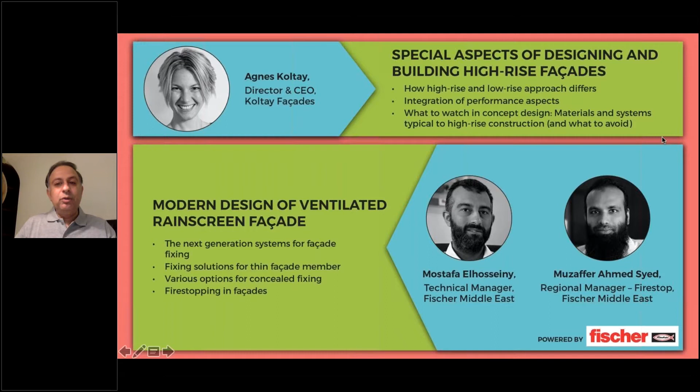Followed by that, we have two of our good friends from Fischer Middle East, who will be talking about products. We have Mostafa, who's a technical manager at Fischer Middle East, and probably to just introduce you to them a little bit.

Agnes is a master's in architecture from Hungary and a master's in facade engineering from the UK. She's worked with Zaha Hadid. I don't need to introduce that. And she's worked at Meinhardt, Ramboll. So before she started her own service here, she was at a consultancy firm, a large practice in the Middle East, very well known, also with an office in Singapore. So she has all the ultimate capabilities, and I will leave it to her.

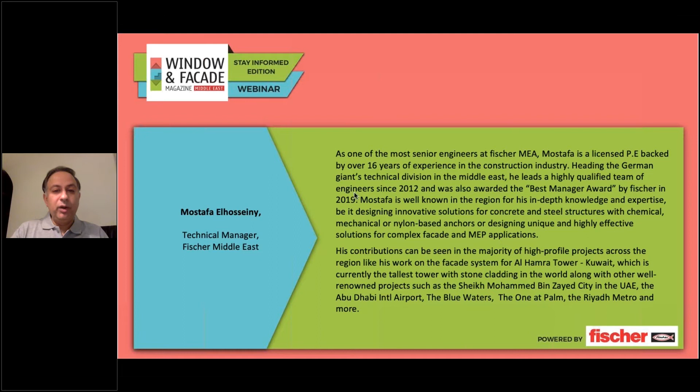Thereafter, we have Mostafa. He's a technical manager at Fischer from the Middle East. He's a licensed PE backed by 16 years of experience in the construction industry. He was awarded the best manager by Fischer. Mostafa is a well-known person in the region. I guess we have a lot of architects and consultants here in this webinar today, so I guess that you would all know him. He will talk a little bit about himself once he starts.

Also, we are joined by Muzaffer Ahmed Syed from the Firestop department, from the fire range of Fischer. He's also a successful and qualified engineer, and his specialty is Firestop. He's going to talk about post-installed anchoring installation systems. He's from IIT, which is a good institution, one of the top institutes in India, and the Institution of Fire Engineers in the UK.

So, ladies and gentlemen, today's webinar is going to be sequenced like this. I have introduced the speakers. Once that is done, then we have a presentation of between 25 to 30 minutes by Agnes Koltay, followed by a presentation by Mostafa and Muzaffar from Fischer.

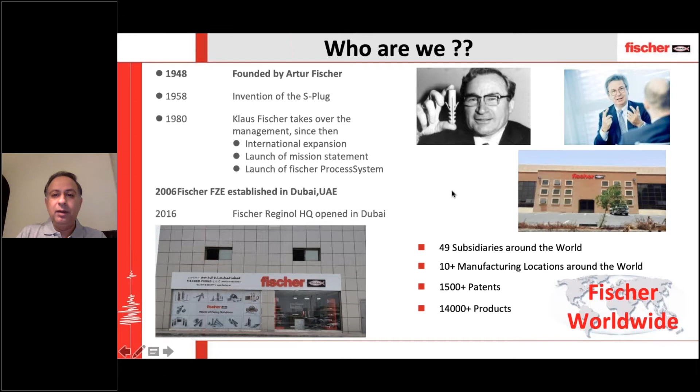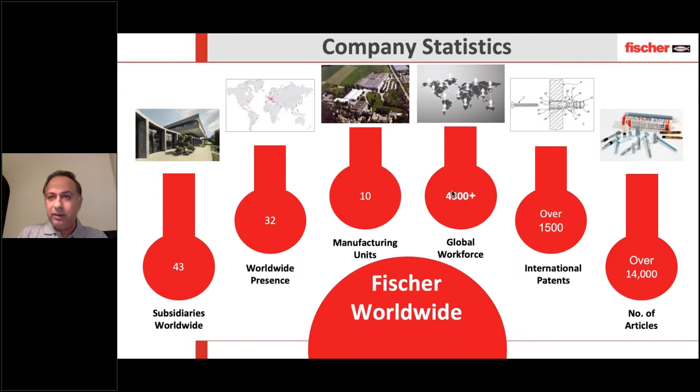So I would now like to ask to bring on Agnes. My colleague at the back end will make her the presenter, please. And Agnes, over to you now to give your presentation. Agnes, you'll have to switch on your camera. Okay, camera is on. All good. Okay, I think it's good now. Can you hear me? Yes. Okay, please. Welcome everyone.

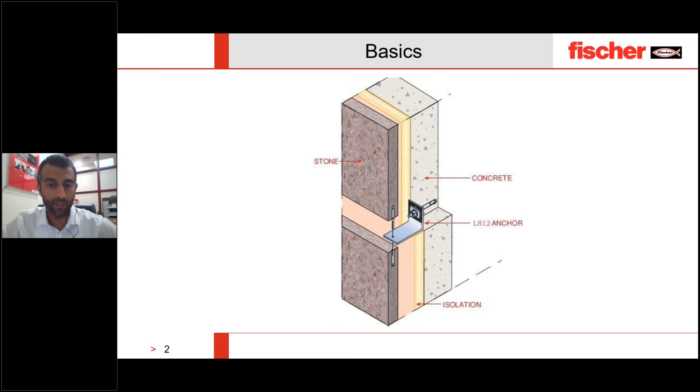And now, after her presentation, we know that the fixing system is important for high-rise, even for low-rise buildings. In the past, there was a need for mechanical fixing, and one of the most famous mechanical fixings for stone is called the pin system. But still, this system has a lot of challenges with the consultants and with the designers. One main thing is the thickness of the facade.

As we know, we have to fix the fixing on the edge. So the edge is a very important factor, and the minimum I think is 30 mm for soft material, and 20 mm can work for hard material with care. The second important factor is the offset from the wall. Usually we have small sizes of stone, and when we have a big offset from the wall, I don't always have concrete to fix my anchors. So I will have a lot of load on the bracket and on the anchor as well, and I might have masonry, which sometimes creates a need for a secondary steel structure.

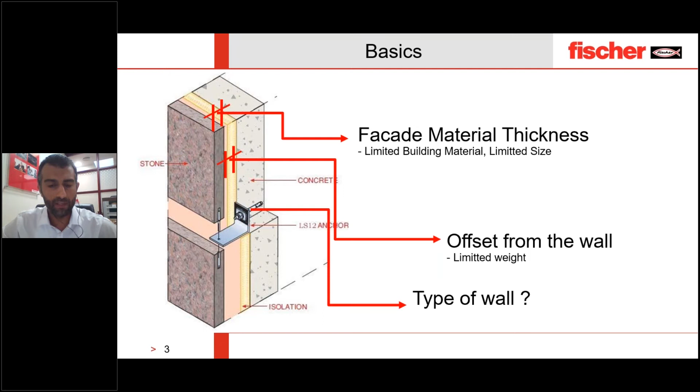The third challenge is the type of the wall itself. Sometimes we have concrete, we will be happy, and a lot of times we will have masonry, and sometimes we'll also have white masonry which is weak. These challenges we face in the design stage, but this is not the only challenge. If you focus on the screen now, one of the most important real challenges for the pin system is how to install it on site.

Usually, because they have to fix the pin in the thickness, they have to drill in the side of the panel. Laborers, to take care not to scratch the surface of the stone, go a little bit to the backside and drill on the side. When they do this, unfortunately, they cause some failure to the panels, and they take the easy way by putting some repair for the stone or some epoxy and fixing it. What happened here? The system is no longer a mechanical system, it became a mechanical system with glue.

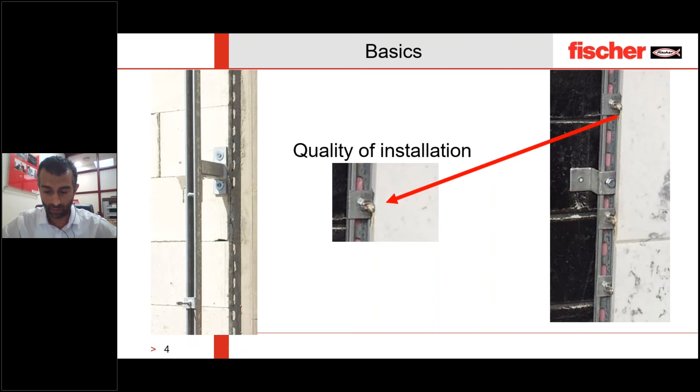And it can cause a failure or safety issue when we have thermal expansion, or also over time with the high temperatures here in our region, the glue can change. So we can also have a failure after some years due to a gluing problem. Due to that, Fischer took this requirement of our clients into consideration. And as we are a specialist in fixing since 1948, we started to develop a system for stone fixing in 1973. It was our first stone fixing.

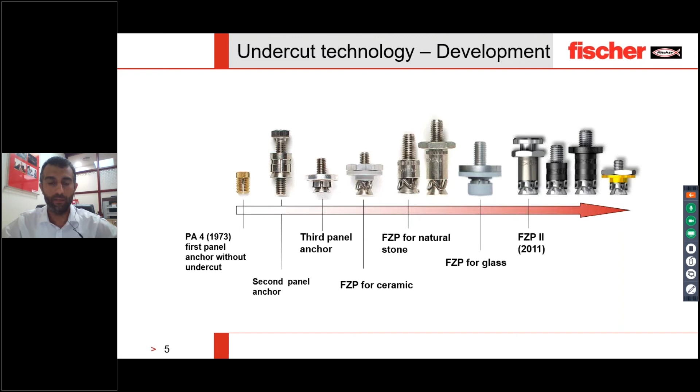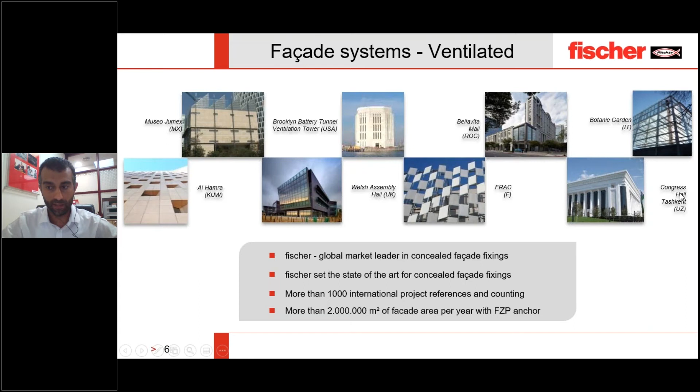From that time till now, we developed our undercut system successfully, and Fischer, a market leader in fixing, is selling yearly more than 2 million square meters of facades. We also have more than 1,000 international references worldwide. You can see here on the screen some of these references.

Fischer developed a system which we can call a universal mechanical system, because it can work for thick stone and it can work for thin material. This advantage of working with thin and thick material means the system can be used for different materials, not only stone. It can be used for stone, ceramic, porcelain tiles, natural stone, fiber cement, GRC, HPL, any material whose thickness is more than 8 mm. We have a good solution for this.

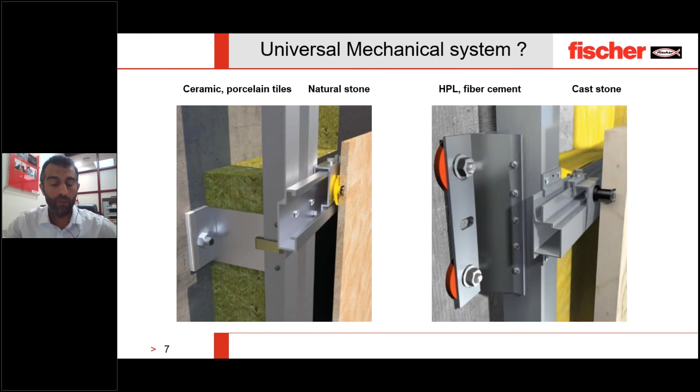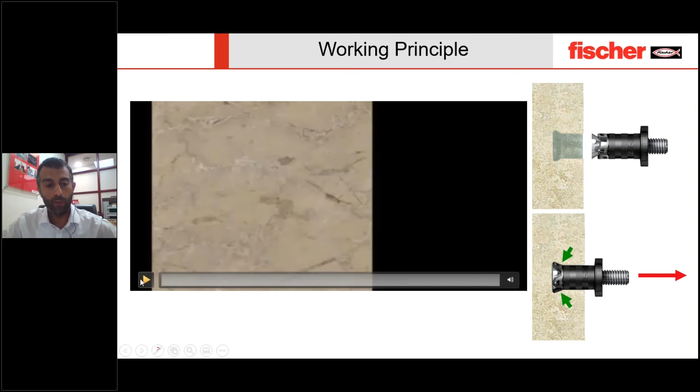This gives our clients, our architects, a wide range of solutions to use the suitable materials and the beauty of the materials in the facades. How does the system work? The system idea is easy and professional. The idea is to create an undercut hole in the stone, meaning the hole inside the stone is bigger than the hole outside the stone, and transfer the actions, wind load, weight of the stone, whatever it is, from outside the stone to inside the stone.

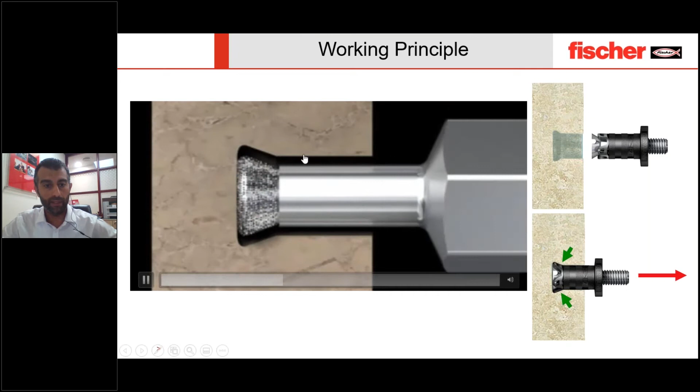The drilling mechanism is easy. By straight drilling, then the drill will rotate to create the undercut conical volume inside. Then installation of the anchor will create a stress-free installation, because the clip will open exactly in the volume we created. So there is no additional stress on the stone.

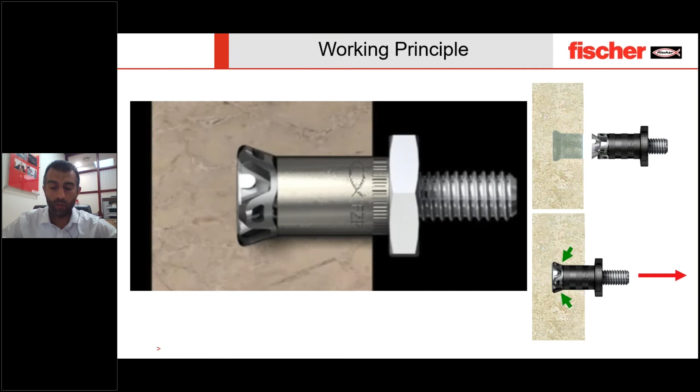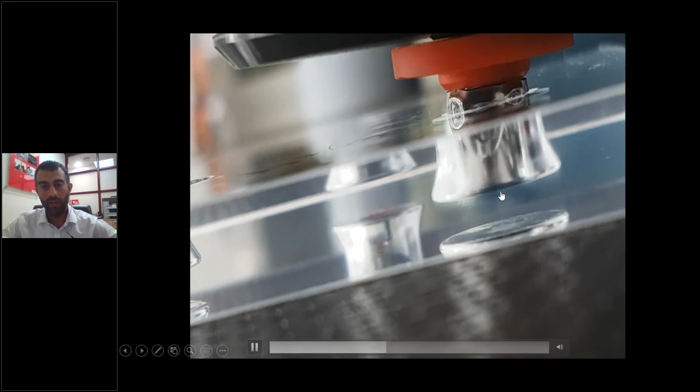I also want to show you practically how it looks. This is a real piece of transparent material, and here is the anchor in front of you. Now we are going to install the undercut anchor in this thin material. It's 10 mm only, and you see it is freely installed inside without any damage to the material.

If you take a deep look, you can see the clip is moving inside here. Even though the distance to the edge of this material is very small, we don't have any cracks or any stresses happening in the material. That's how it is going inside.

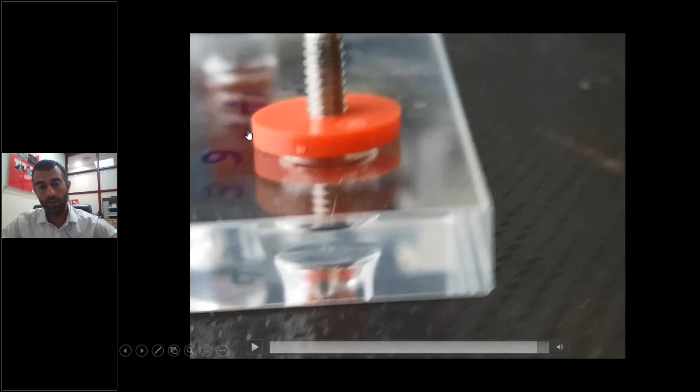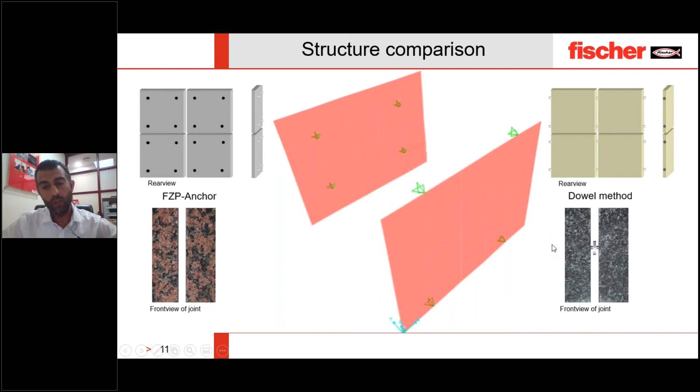To understand the benefit of our system, we created a structural comparison between the pin system and the undercut system. You can see here two different panels we modeled in finite element software. A structural engineer can understand how this can be modeled in the software. This panel is with the pin system and this panel with the undercut system, and all other conditions are the same. We did not change the panel size, the wind speed, the wind suction, or anything else.

When we do the comparison, you can see here the colors of the stress diagram. You can see how high the stress is for the pin system. It reached almost 56 megapascal, while the stress for the undercut system only goes between 12 and 24 megapascal. That means we can reduce the stress on the material by more than 50%.

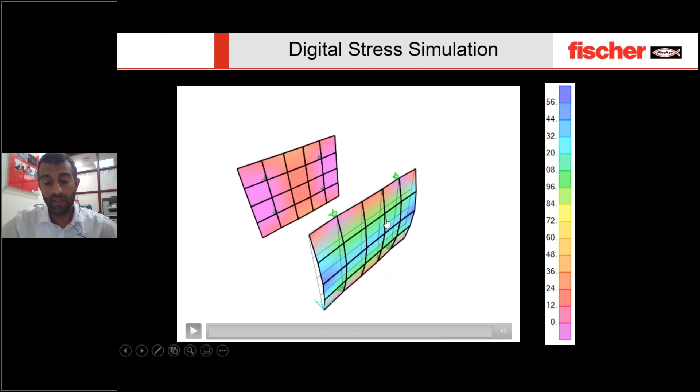We made a conclusion for this. We did a lot of case studies, not only one. Some with height to length ratio 1 and one with height to length ratio 2, meaning a square panel and a rectangular panel. We checked how much the deflection is and how much the undercut moment is. We found that the moment of the undercut relative to the moment of the edge is only about 36%.

What does this mean? It means that with the undercut, if we have a panel of 50 mm, the thickness can be reduced to almost 30 mm only. And if we have to design with a stone or facade panel of 30 mm, with undercut you don't need more than 18 mm under the same conditions, the same loads, the same sizes. So this gives us several benefits. Either we have better loading or we can go for bigger panels.

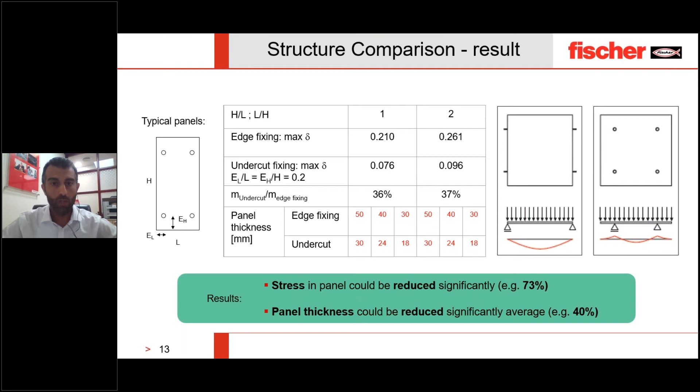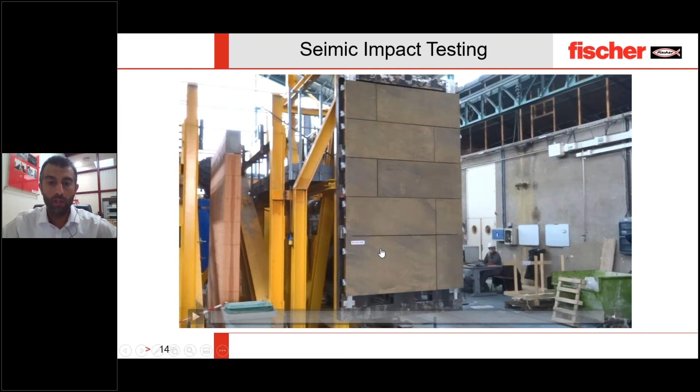We don't only do theoretical demos or simulations, but also practical ones. Here you can see we did some seismic tests. Under the seismic wave and impact loads, the stone is moving, but nothing is happening to the system. The stone is safe under these high loads. Of course, if you try to do this with a pin system, it is very challenging. So we do a lot of simulation, a lot of engineering, and a lot of practical tests as well.

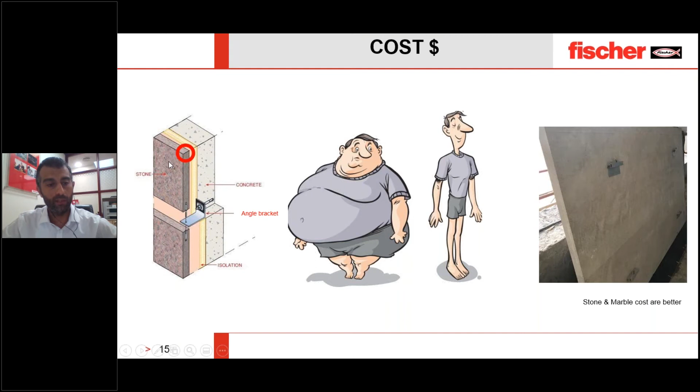This gives a lot of benefit to our clients. Instead of having a very high weight of stone, you can have a lighter one. This gives a direct benefit of reducing the total cost of the system. Just imagine, the main cost is almost the stone. We can reduce the cost of the stone by almost 40 to 50% directly on the material.

Also, if you have a project, for example, of 6,000 square meters, before we start we have to plan our logistics area. We have to plan storage on the site, how many containers we have to buy. All this logistics and storage can be directly reduced by 40 to 50% only by making better designs, by choosing the correct fixing system.

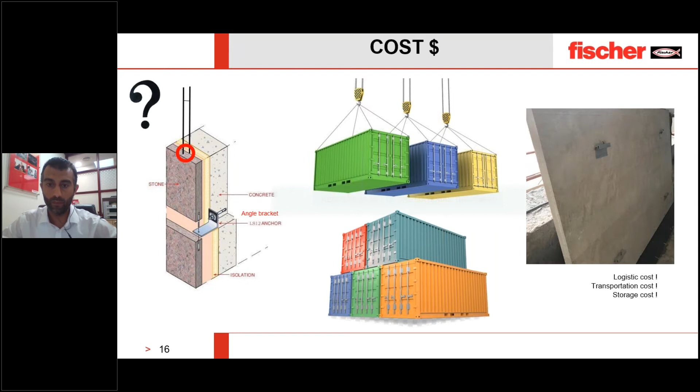Also, reducing the weight is very important. You can imagine when the laborer is lifting a panel which is 100 kg, it is easier for him to lift a panel which is only 50% of the weight, half the weight. And I can give you one practical example from indirect cost.

When we have to design a structure from a structural point of view, and we have in this structure 6,000 square meters of limestone, if we have 50 mm stone and we have to design it to use a pin system, the total weight of the facade will come to 660 tons. But if we can reduce the thickness of the stone to only 30 mm, then the total weight will be 396 tons. This will reduce the weight of the full building by 264 tons, which is a very huge saving in terms of the structural system as well.

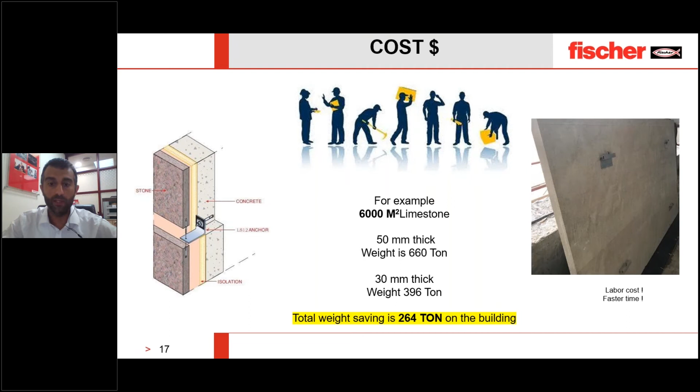So the system has a lot of benefits from a structural point of view, but we don't only focus on structure, we focus also on the architectural point of view. We know that consultants like Koltay or all other consultants love to see natural stone on the facades. So the problem faced is that the thickness of the stone can vary because it's a natural material. So we developed a system which can work for artificial stone as well as natural stone, even if there is some tolerance in the panel.

The idea is the distance from the facade to the fixing point of the anchor will be always constant. And in between, it can take whatever difference or variation in the thickness. So this will lead to less work on site for adjustment and a better, amazing looking facade from an architectural point of view.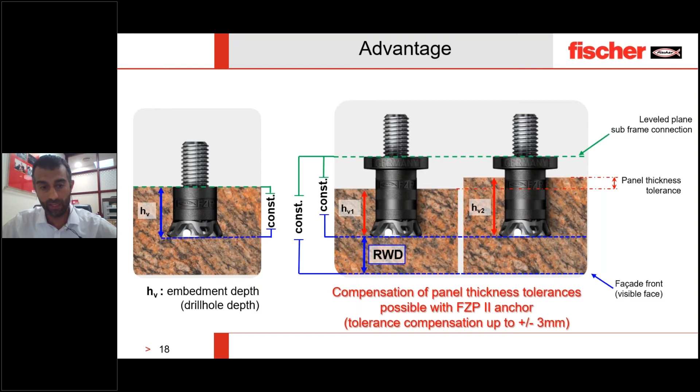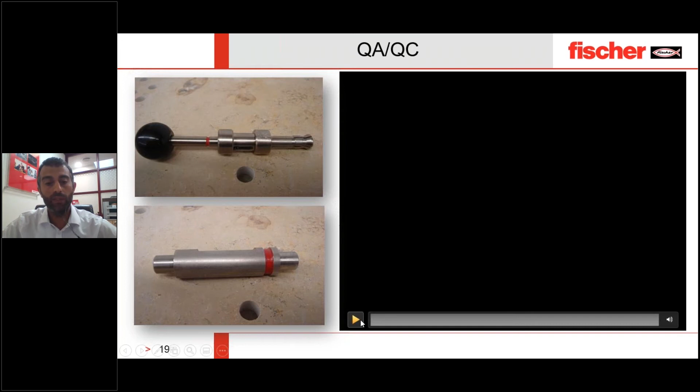Our main aim also in Fischer is not only the product, but the quality. So when we developed the system, we developed also an easy way of quality check to be sure that the system is at the highest level of quality. So this tool is very easy. You can just put it in from one side, and it tells you the hole is okay. And from the other side, it should not go, so the hole is okay. And this is called a volumetric check.

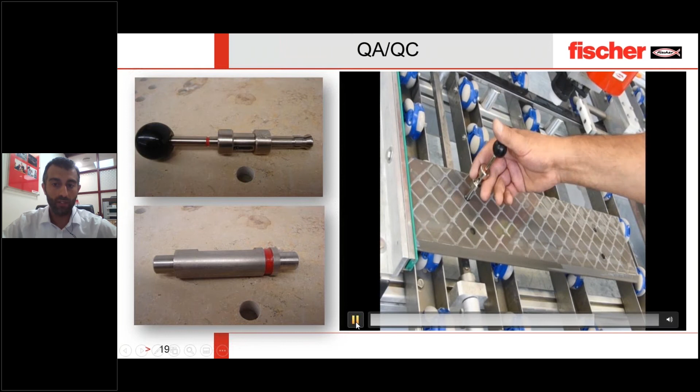So these tools you have to put inside and click. If you see the red mark, that means the hole is not okay. If it is not visible like here in the video, it means the hole is fine. So also the quality check does not require a high-end professional engineer to do it. It can be done easily by our system.

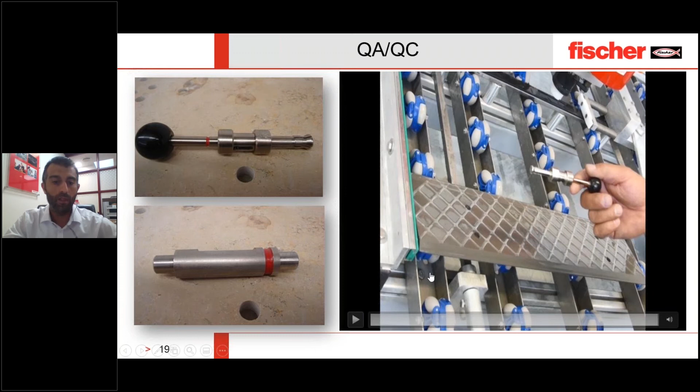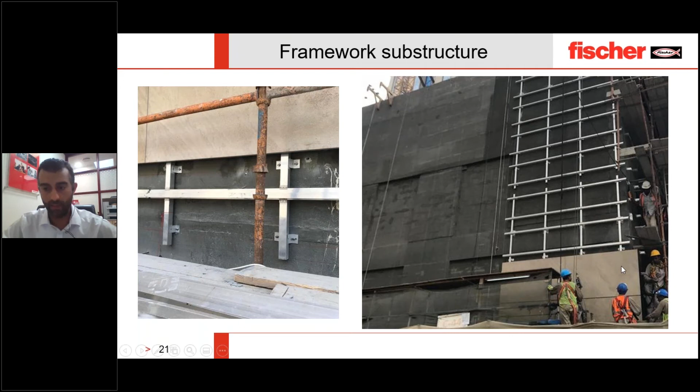So this is how it looks after installation. We can supply, here on the screen, the full system, not only the anchors or the undercut anchor, but even the aluminum profiles as well. As a conclusion, I would like to highlight that our system has the benefit of saving time, the benefit of saving cost, a high level of quality and safety, and also it helps our clients with the architectural beauty they are looking for.

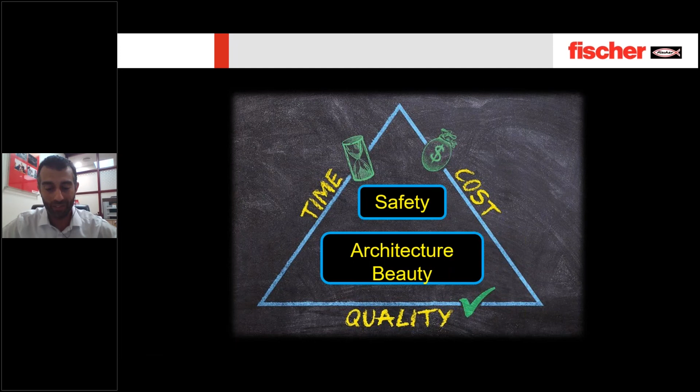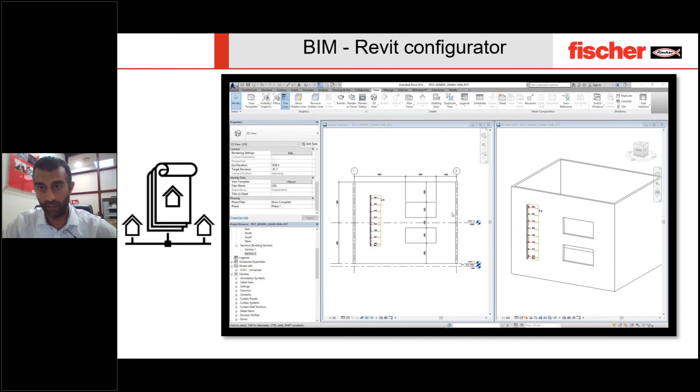Not only is our benefit limited to that, but also we are developing our BIM families for the facade with a dynamic model, which you can just copy onto your facade BIM drawing and extract, and it will automatically take the measurement of the facade and put the details of the frame, anchors, undercut anchor, everything. So it is very easy and fast for our engineers to do.

We as Fischer provide a full system, not only an aluminum system or anchor system, but also we have a Firestop system. So here I'm ending with the stone facade fixing system. My expert, Mr. Muzaffer, will speak more about the Firestop system for facades to explain to you all our services in terms of fixing and also Firestop. So I would like to ask Mr. Ahmed to hand over to Muzaffer.

Thank you so much. Very interesting. I loved your videos in which the anchors are actually showcased and how they work. So I think, of course, Fischer is a great company and they do have all the German engineering in place. I now take you over to Muzaffer. Muzaffer, the ball is yours. You can share your screen now and take on your subject. You have another 15 minutes.

Between 10 and 15 max. Great. So I think my screen is being shared. Yeah. It's visible? Yep, great.

All right. So after an interesting talk with Ms. Koltay and an interesting description of the support systems, the aesthetics has been addressed, structural safety has been addressed. The only remaining primary concern in terms of safety in facades is the fire safety. Now, generally, the chances of ignition of fire within the facade system is negligible. However, the spread of fire becomes a significant safety concern, which was voiced by Ms. Koltay also in her discussions. So let us discuss in detail about this.

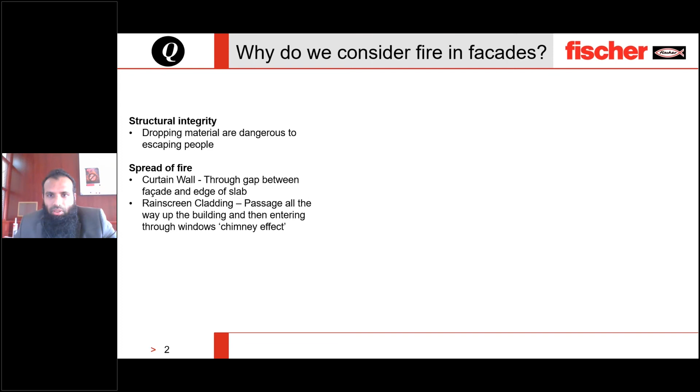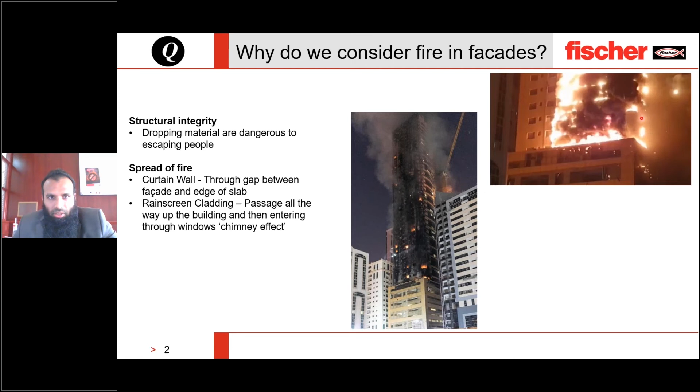Now, before we start, let us consider the fact that in case the facade is exposed to fire, why do we need to consider fire in facades? Firstly, the facade support system loses structural integrity. This results in falling of burning objects, which might pose a massive risk of injury as well as igniting secondary fires. This image here shows an example of a facade fire that occurred in the upper floors. As you can see, the fire was only in the upper floors and spread upwards. However, the devastation caused by the falling debris could be seen in this image.

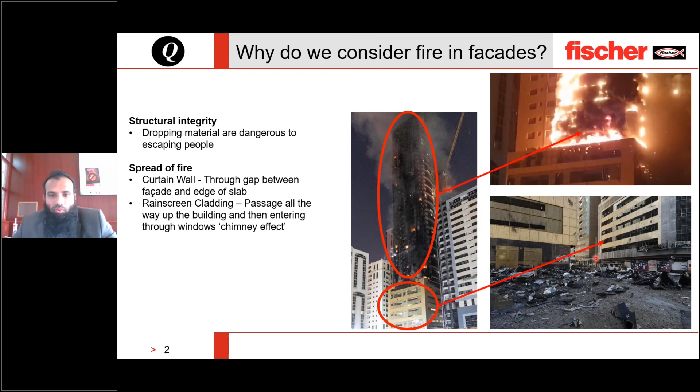Secondly, there is a significant risk of propagation via the facade system itself, and we will discuss this risk a little in detail, keeping within the time allotted for this segment. Here I have a small video: how a fire starts in a lower level, spreads via the facade surface, engulfing the entire facade elevation within a very, very short time. The speed and the extent of the spread of fire depends on several factors, including the facade material, the fire compartmentation, among others. In this case, we could see it took a very short while for the fire to spread to the highest floor.

Now, once spread on the surface of the facade, the fire could quickly re-enter the upper floors, thereby ruining the entire passive fire protection of the complete building. Facade fires have been witnessed in several significant buildings, most recently in the Abbco Tower in Sharjah, UAE. Improperly sealed perimeter joints or cavity barriers and use of non-tested materials cost lives and huge liability losses. This is the reason why fire safety in facades is a primary concern for many people.

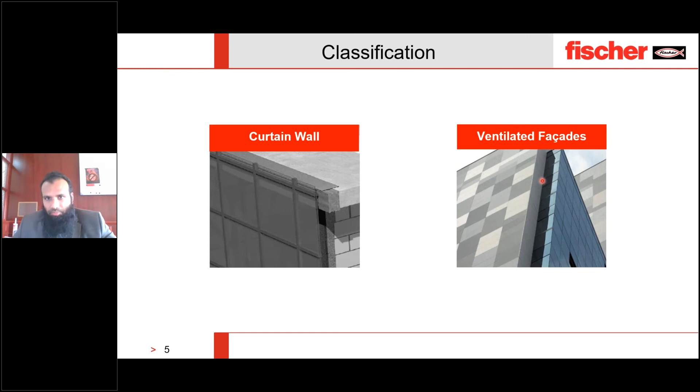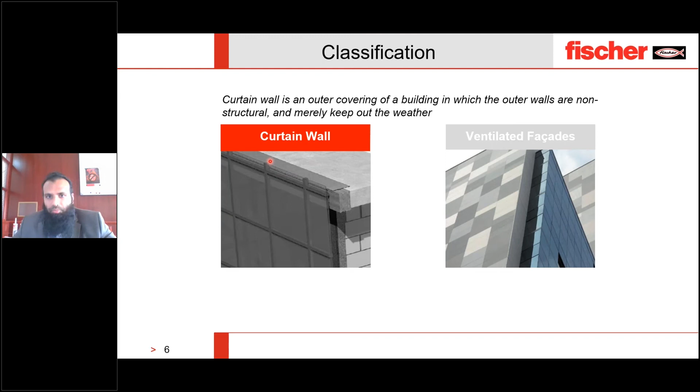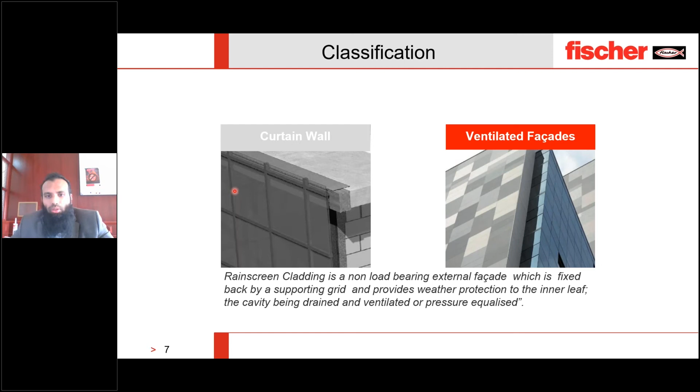That being said, for an easier understanding, we look at two main types of facade we encounter in high-rise buildings, namely the curtain wall and the ventilated or rainscreen facades. Curtain walls are an outer envelope of the building. The buildings with curtain walls do not have an external structural wall, and these facades are generally governed by aesthetics and are responsible for shielding against the external weather elements. On the other hand, the ventilated facades are also an aesthetic skin over the building structural wall, and they also aid in overall insulation of the building from the weather. There is a ventilation gap behind the facade itself, and let's look at what are the fire safety challenges in both and understand how the fire spreads in either of them.

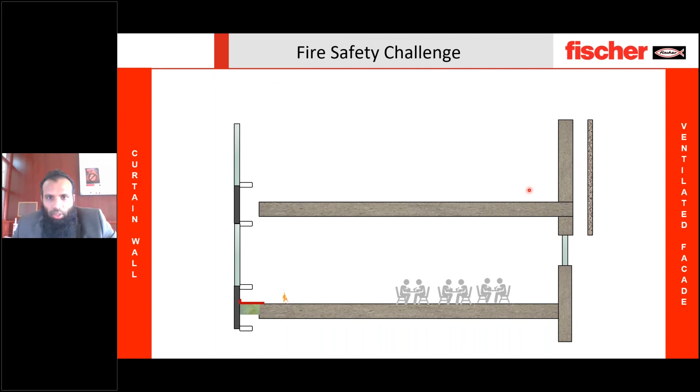So this is a section through a building with a curtain wall facade installed on one side and a ventilated facade on the other side. When a curtain wall is exposed to an internal fire, the first route the fire and smoke spread is via the unprotected gap between the slab and the wall. Now Fischer provides a solution to close this gap and prevent the internal spread of fire and smoke.

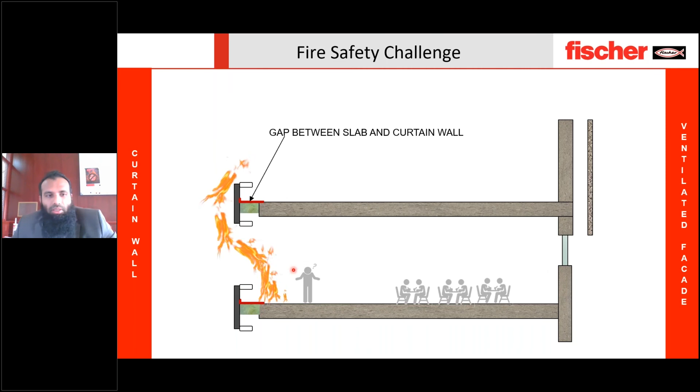However, there is a second route the fire could take, that is from the external side after the glass panels have broken under extreme heat. This is known as the leapfrog effect and is dependent on the type of the facade, the size of the spandrel panels, and other active systems in place.

Now, on the other hand, the fire behavior in the ventilated facade is slightly different, as an internal fire could reach the ventilated facade system via a broken opening like the windows or doors in the structural wall. The fire would rapidly propagate within the ventilation gap, and this phenomenon is known as chimney effect or the stack effect. Now Fischer protects against this propagation of fire in this gap.

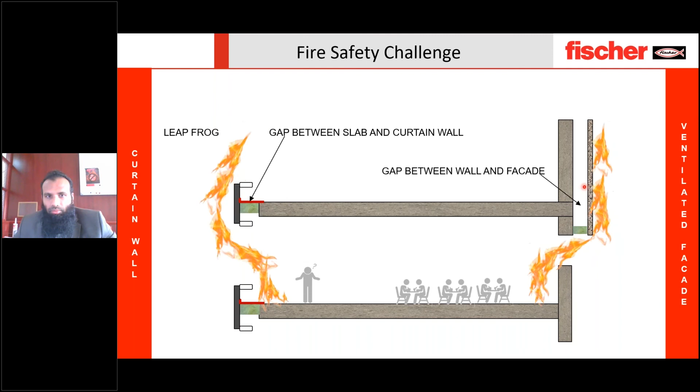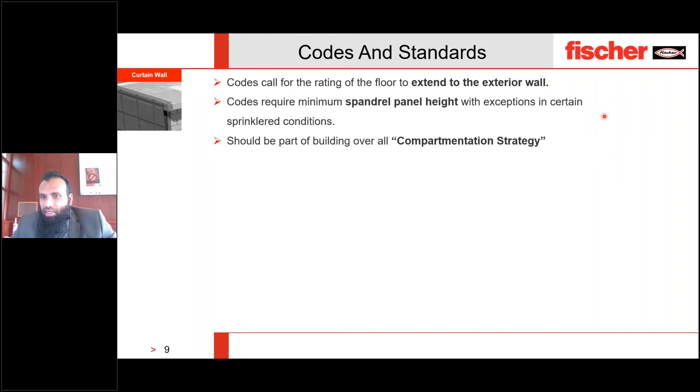Again, there is a second route the fire takes to spread via the surface burning of the facade material itself. And this is again dependent on the characteristics of the facade material itself. Now, there are codes and standards in place to address this fire behavior as well. So the summary of the code requirements for curtain wall facade is to ensure that the fire rated floor is extended to prevent the internal spread of fire, and then the minimum spandrel height is a guideline to take care of the leapfrog effect.

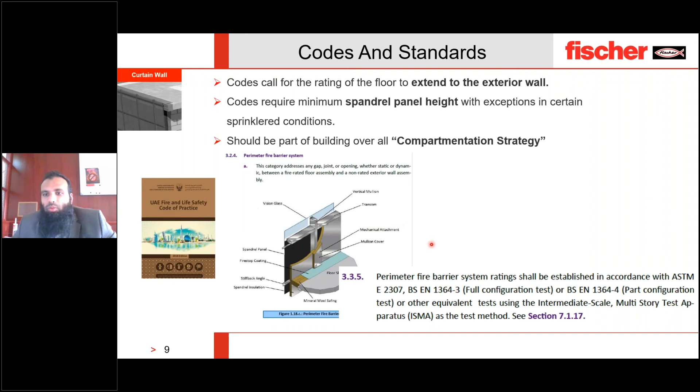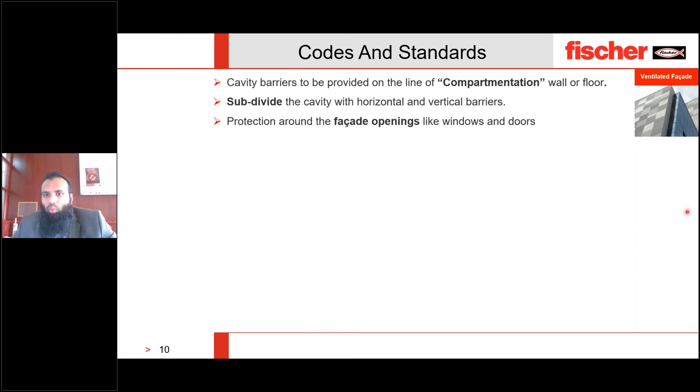Now the code issued by authorities having jurisdiction, for example, the UAE Fire Life Safety Code, also has detailed guidelines on this with a similar intent of addressing the internal as well as external spread of fire in the curtain wall facades. Similarly, for ventilated facade, the code requirements ensure the compartmentation within the ventilation behind the facades to prevent the spread of fire via the chimney effect, and also there are guidelines on the facade material to restrict the surface spread of fire.

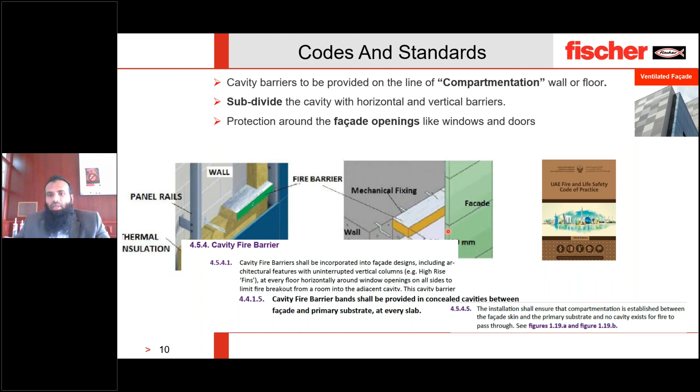Sorry. Now, the code issued by authorities having jurisdiction, again, for an example, we take the UAE Fire Life Safety Code, also has a detailed guideline on this with a similar intent of addressing the spread of fire within the ventilated facade systems.

Now, finally, just to give a quick peek into the solutions that we provide, we have several listed and tested systems with international testing and certification bodies like the UL, Intertek, or Warrington Fire, etc., for systems designed for perimeter fire barriers in the curtain wall facade. Now, we could offer a spray type sealant solution using the RFS or FFBES over the stone wool backing, or a dry type of system using just the Fischer FCFCL.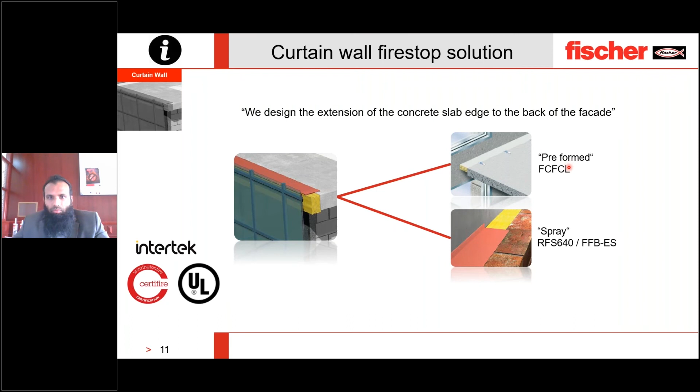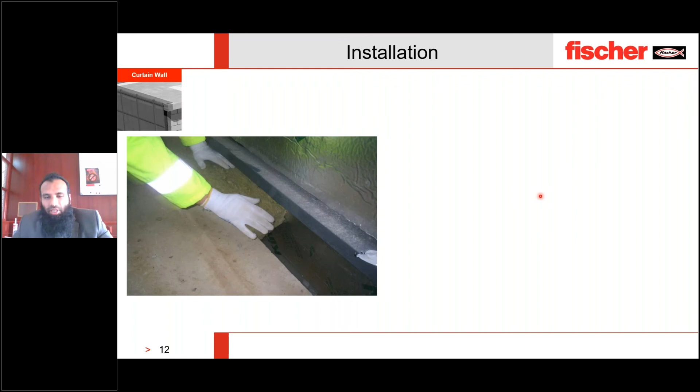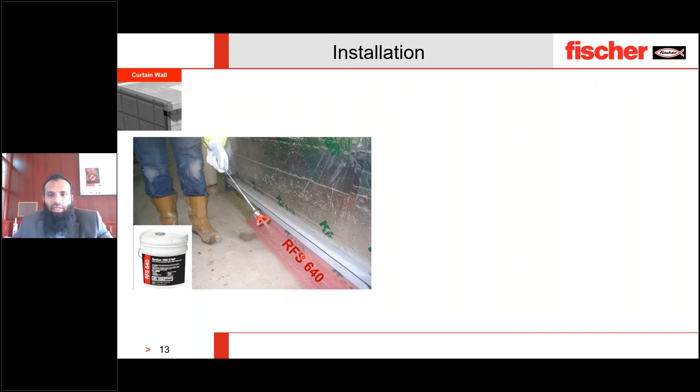Just to briefly show you the application of the wet system, which is a very fast and effective way of providing fire barrier in the perimeter fire barrier systems, where the backing material is placed in and then the sealant is applied using a spray equipment. Now the RFS comes with a cutting edge system with just 1.6 mm of wet film thickness for a joint of up to 200 mm width, which has considerable saving in terms of the material. This is the finished look of how it would appear once the fire barrier is in place.

Now, just to give you a brief comparison between the wet system and the dry system for fire stopping, there are certain underlying parameters that are affected and should be in consideration before deciding a particular system in a project. For example, there is no water resistance offered by dry system and the movement capability is severely limited. Also, the logistics and the storage cost will be higher due to the increased space taken up by the product used for the dry system. On the other hand, the RFS-based wet system aces in all the parameters except the speed of application, as this requires a two-part installation of the backing material and the spray system itself.

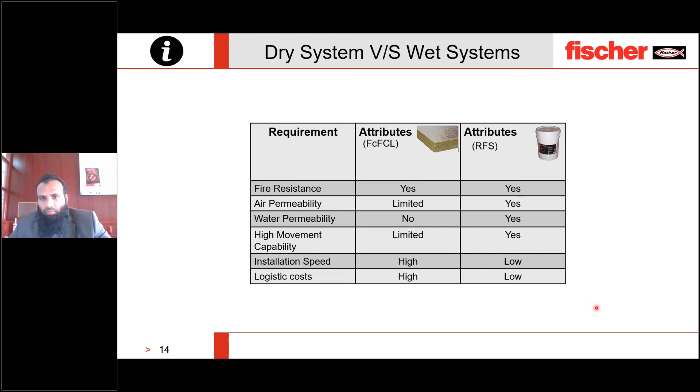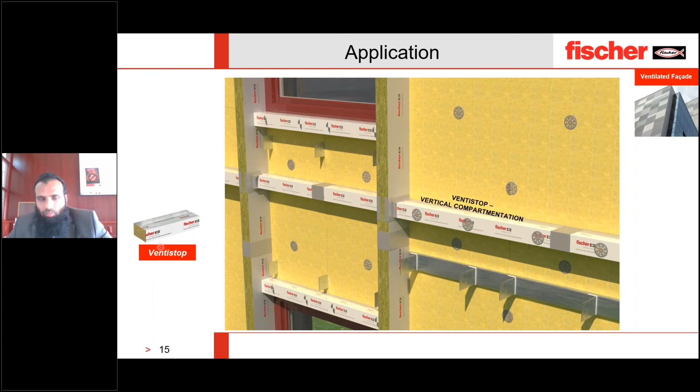Lastly, we look at the solution that we provide within the ventilated facade system. As it could be seen in the image, this is the structural wall, and then you will have a facade coming over the compartmentation generated by the product itself. So the vertical compartmentation is provided by Ventistop, which ensures the ventilation is present in normal conditions, but would close once there is a fire incident happening within the facade. Also, the horizontal compartmentation, as required by several codes, is provided by the FCFCL system. Once this is in place, you can just place the facade over this, and you are sure that the compartmentation is in place behind the facade itself.

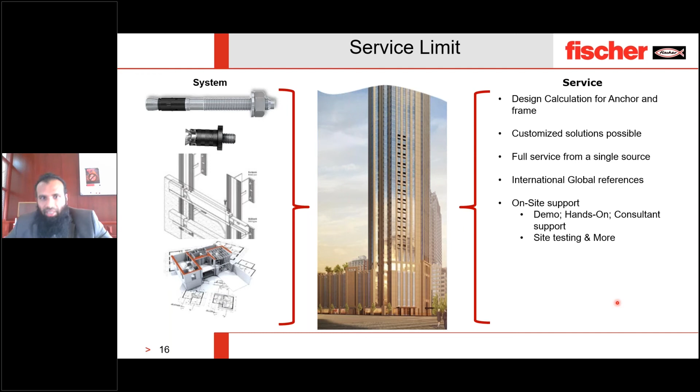This ensures peace of mind for all our partners. Now, I would request our host to play our video.

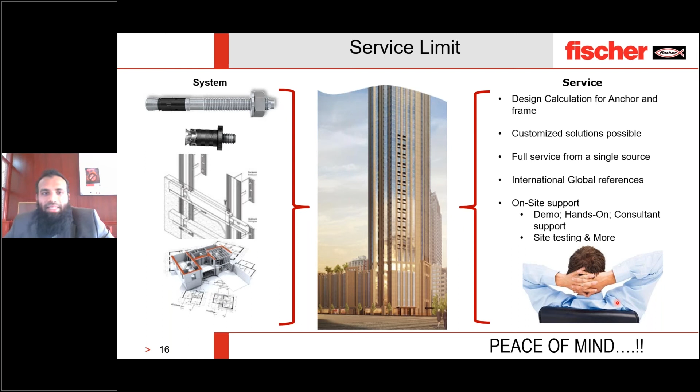So I'm going to go on to a few questions. There are about 70. Wow, so many questions. So I'm going to take up the ones which I, not the most technical person around town, but I'm going to give it my best.

There's a question from Nada Chami. This one's for you, Agnes. Does Koltay Facade explore lightweight solutions to reduce structural load and embodied carbon in high-rise building projects? If yes, what are the main challenges going lightweight?

Yes, it depends on what's the aim of the project and the developer. In some projects, weight is not one of the major considerations. In some other projects, the main structure has certain limitations. To tell you a good example, Museum of the Future, it's a donut-shaped building and it's a steel structure, and the weight of the facade does matter a lot because it's pulling the structure down.

So depending on the shape and structure of the project, it can be a very serious or not as important consideration. Also, it's important when it comes to building. It's echoing for some reason. When it's an additional building, like an additional floor on an existing building, or using an existing structure in a renovation project and putting something else, then in that case, weight is very important.